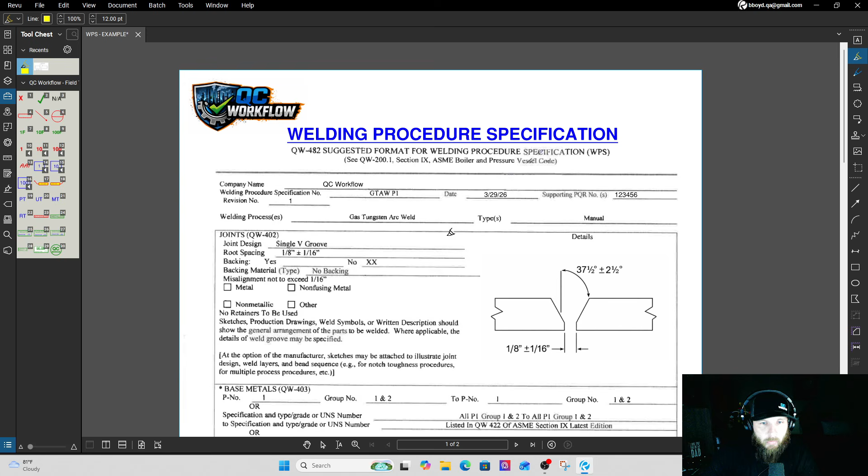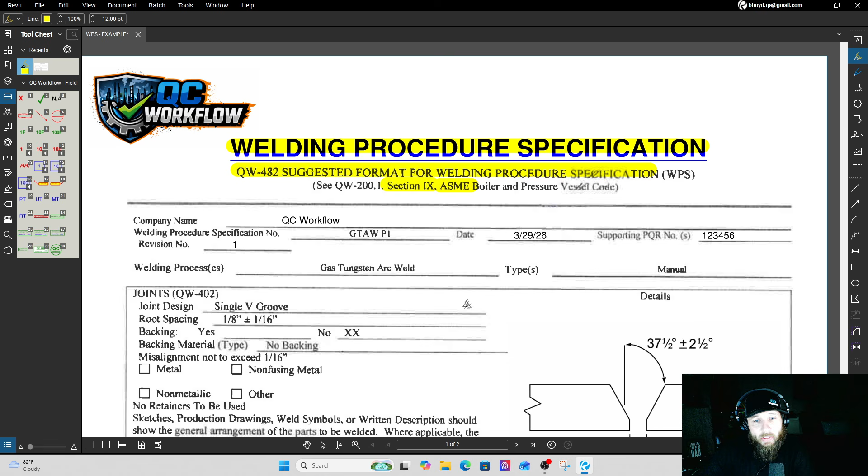Let's get into it. Alright, so right here at the top we can see it says Welding Procedure Specification, WPS. Underneath that it says QW-482, suggested format for welding procedure specifications. This is just saying that per ASME Section IX, this is just a suggested format. So it doesn't have to look exactly like this, but this is a really commonly used format and a really good one to learn from.

So right here, company name, we have QC Workflow. Our welding procedure specification number, we got GTAW-P1. This is basically just a unique number that every procedure should have for tracking purposes. A lot of companies are going to have something different there, but there's always going to be some type of unique numbering system. For date, we have 3/29/26. For revision number, we have number 1. This date is important. You always want to make sure it's the most up-to-date procedure, because you don't want to be using one that's already been superseded by another one.

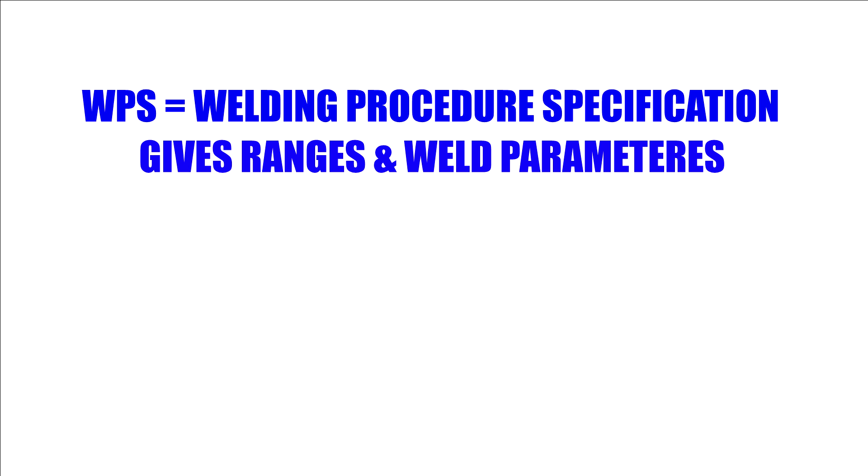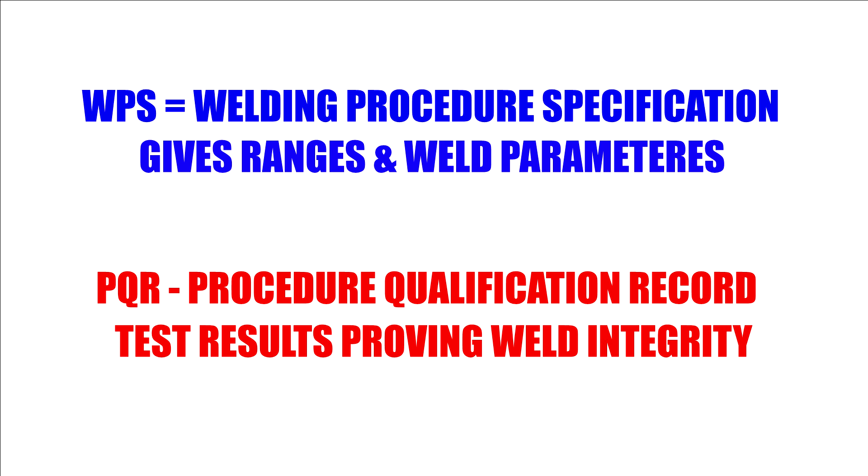So right here we have supporting PQR number, and we have a number here. This number is really important. It's a big deal, so let's do a quick 30-second breakdown. The WPS gives you acceptable ranges and tells you how the weld is supposed to be done. The PQR, or Procedure Qualification Record, is the record showing test results proving that the procedure will work. Basically, a weld was made using specific criteria. The weld was tested. Those test results are documented in a PQR. The test results prove that by using that criteria, you can produce a weld that is reliable.

Once this is proven, then a welding procedure is developed, giving you the ranges that you can use to make the weld. Bottom line, you can't qualify a welding procedure without a PQR. The WPS is the instruction sheet and the PQR is the evidence backing it up. My next video will be a line-by-line breakdown of a PQR.

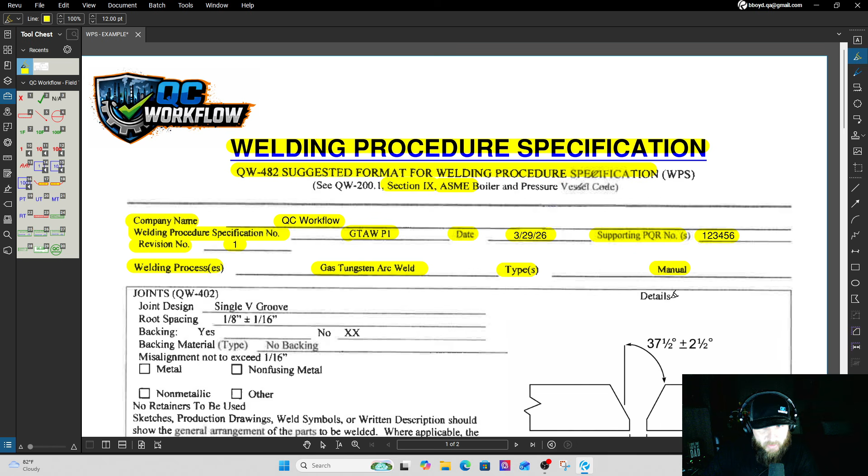So here we have Welding Processes. It says GTAW, or gas tungsten arc welding. This tells the inspector and the welder which welding process this procedure was written for. It has to be followed. That can be the only process used with this procedure. If you try to use a different process, then you're changing an essential variable and a new procedure would have to be qualified. For types, we have manual. That's just telling us that this welding has to be done manually. It can't be done with a machine or automatically.

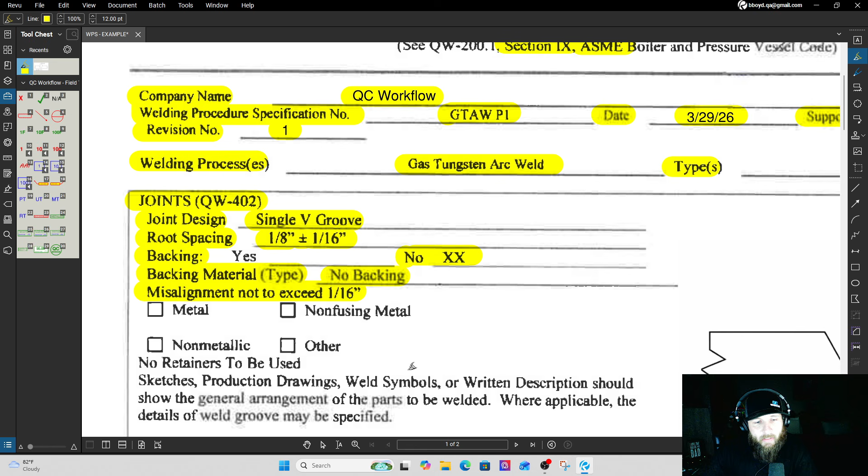Now moving into joint details. For this procedure, the joint design is a single V groove. For root spacing, it shows 1/8 inch plus or minus 1/16 inch. So you want your root spacing to be 1/8 inch. That's the target measurement, but they give you a little bit of play there, plus and minus 1/16. For backing, it shows no, so no backing is allowed. And for backing material, it shows no backing, which makes sense. Misalignment not to exceed 1/16 of an inch. So they are referring to fit-up, and that is your tolerance for your high-low whenever you're fitting your pipe.

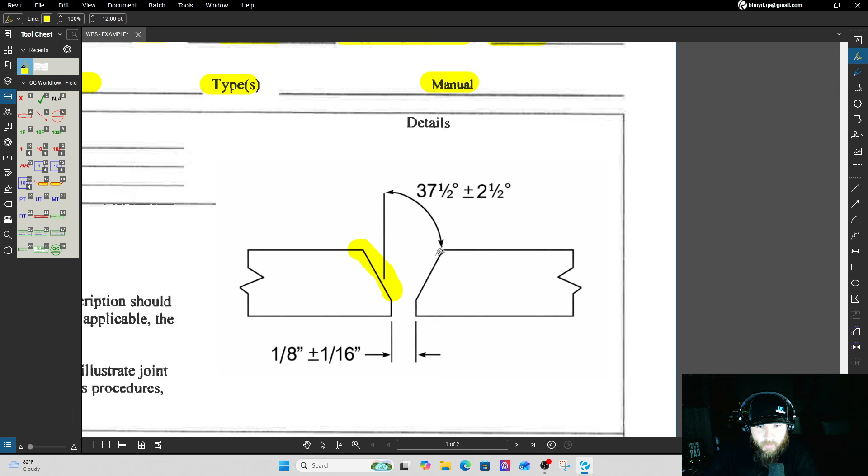So moving over here to the right, we have our joint detail. This is just reiterating what the text says over here, which can be more helpful than just trying to interpret this from text alone. You can see that it shows a single V groove with your 1/8 inch root spacing plus or minus 1/16 inch, and it shows a bevel angle of 37.5 degrees plus or minus 2.5 degrees. So if someone asks you, hey, where'd that bevel angle come from? Then you can show them it's right here on the welding procedure.

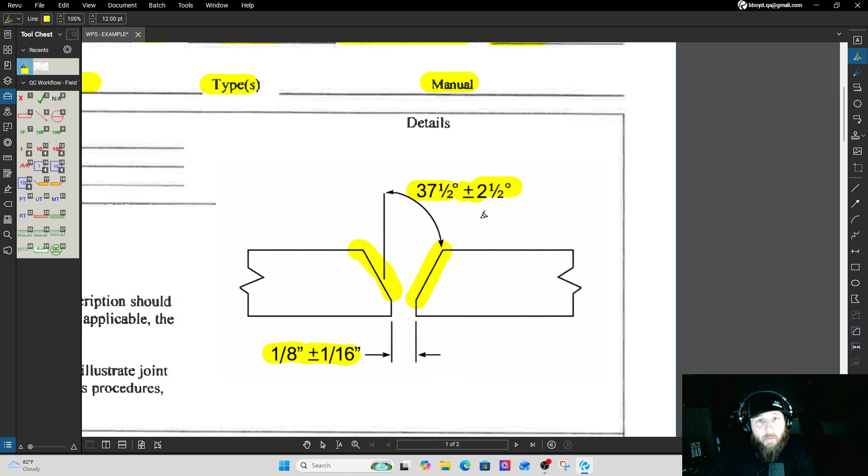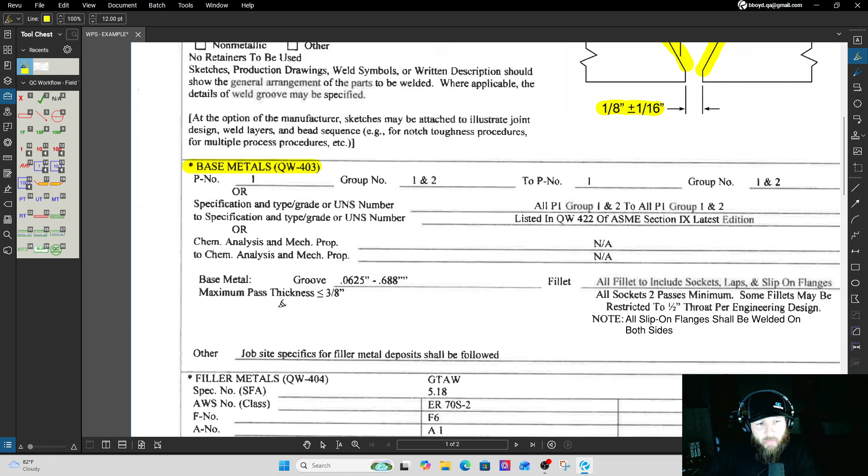So moving down to base metals. This section basically just tells us what materials and what ranges this procedure is qualified to weld. So this shows that we can weld P-Number 1, Group Numbers 1 and 2, to P-Number 1, Group Numbers 1 and 2. Under ASME Section IX, P-Numbers group materials with similar welding characteristics.

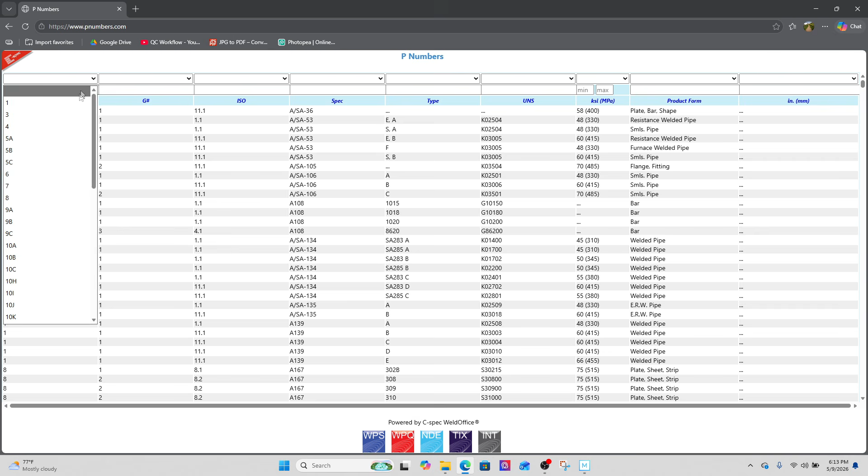Specification and type and grade. It shows all P1 Group 1 and 2 to all P1 Group 1 and 2. That means this procedure is written to apply across that range of base metals, not just one grade.

Now we are at base metal thickness. For groove welds, it shows 0.0625 inches to 0.688 inches. So this is your range of thicknesses for materials you can weld. So you can't weld anything less than 0.0625 or around 1/16 of an inch. And you can't weld anything thicker than 0.688, which is about 11/16 of an inch.

You have to stay in that range or else you're changing an essential variable and you would have to requalify a new procedure. For things like this, you can use a decimal to fraction conversion chart.

Here it shows fillet weld requirements. It says all fillet to include sockets, laps, and slip-on flanges. All sockets must have 2 passes minimum. Some fillets may be restricted to a 1/2 inch throat per engineering design. And it has a note here that says that all slip-on flanges shall be welded on both sides.

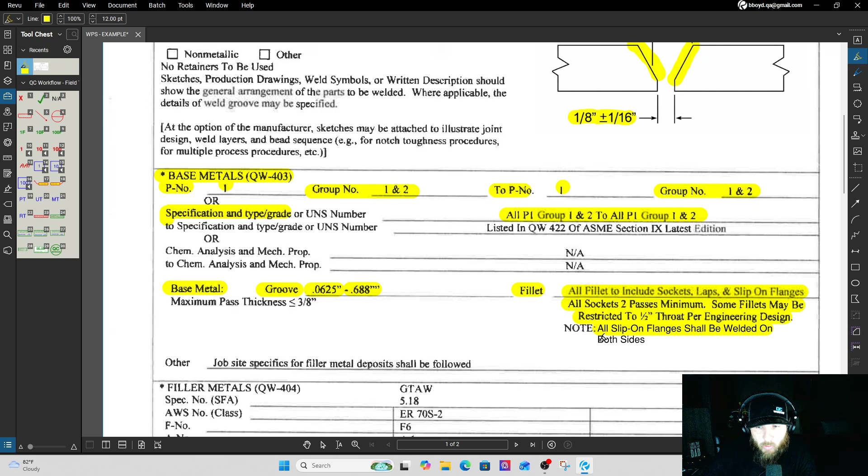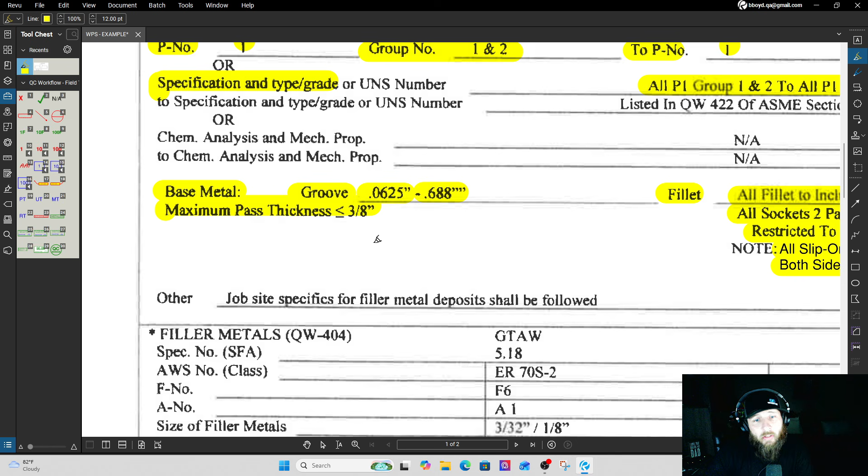Coming back over here by base metal, it shows maximum pass thickness is less than or equal to 3/8 of an inch. So that's saying that in each pass, the welder can't deposit a weld that's thicker than 3/8 of an inch. So now let's take a look at filler metals. This section tells us which consumables are supposed to be used. Specification number, we have 5.18. This is the ASME spec that governs carbon steel filler metal for gas shielded arc welding.

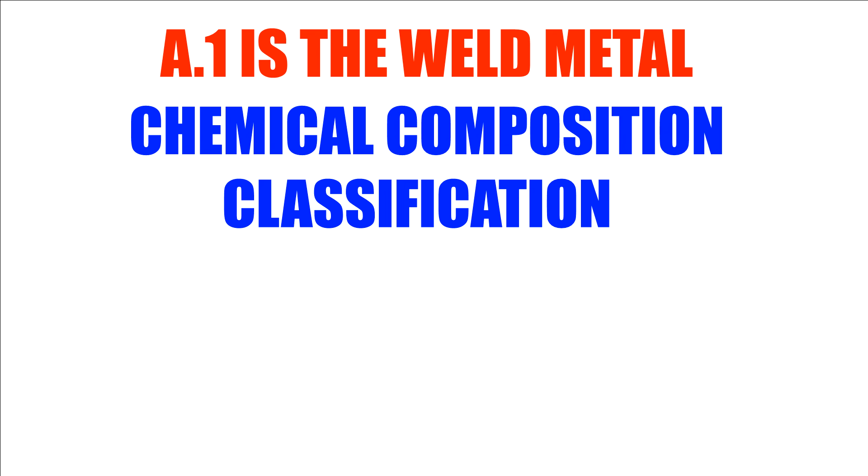For AWS number, it says ER70S-2. That is the type of wire that we would need to use when using this procedure. For F number, we have F6, and for A number, we have A1. F number 6 is an ASME Section 9 filler metal weld group. It covers solid wires and rods for GTAW and GMAW filler metals. A1 is the weld metal chemical composition classification. It specifically corresponds to weld metal with carbon steel chemistry.

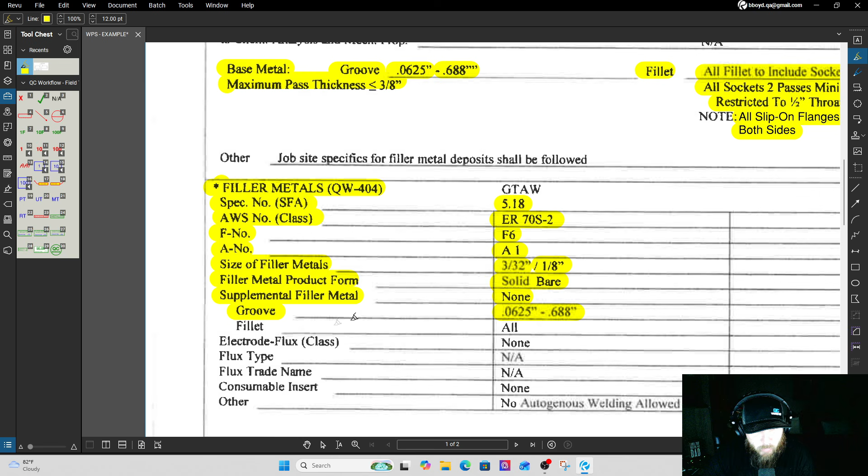For size of filler metals, we have 3/32 and 1/8. Those are the sizes we have to use. Filler metal product form is solid bare, which makes sense because it's GTAW welding. There is no supplemental filler metal. Here it again shows us the range for our thickness for our groove welds, and for fillet welds it says all. That means that any size fillet welds are allowed as long as you're still staying within the limits of this procedure. For electrode flux class, we have none.

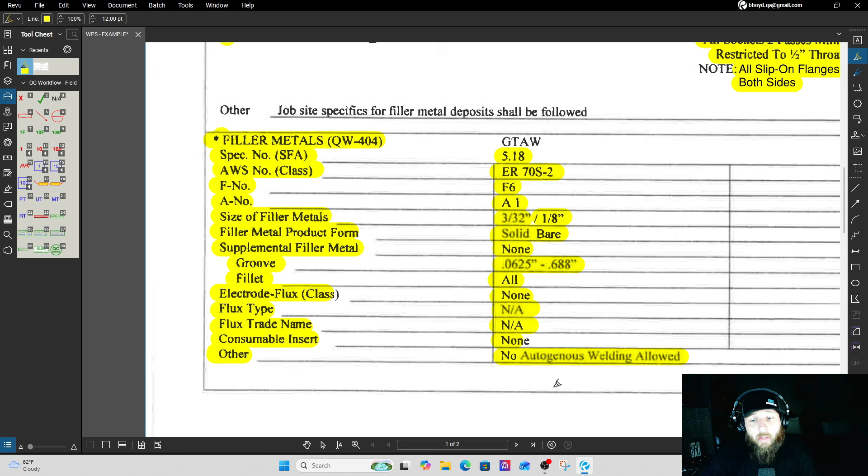For flux type, we have NA. Flux trade name, NA. Consumable insert, none. And that's because this is all GTAW welding and we're not using any kind of flux. So this note's pretty important. It says other, no autogenous welding allowed. So that is telling you that you have to use filler metal whenever you make a weld. In GTAW, sometimes you can weld without filler metal. This is just telling you that you cannot do that. If you do that, then you're changing an essential variable and you would need to qualify a new procedure that allowed autogenous welding. So moving on to page 2.

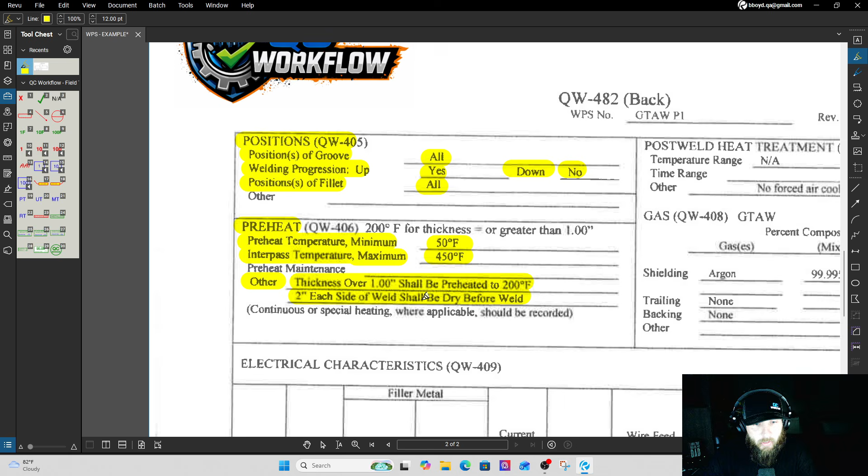Moving over here to the right side, we have post-weld heat treatment. For temperature range, it shows NA. There's no time range. So it's basically telling us that post-weld heat treat is not required using this procedure. It does show other, and it has no forced air cooling permitted. So even though there is no post-weld heat treat, there is still a cooling requirement that you have to pay attention to.

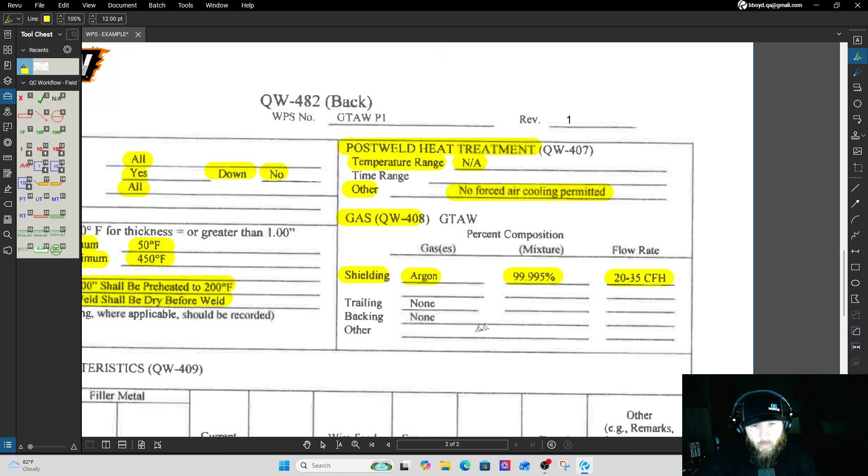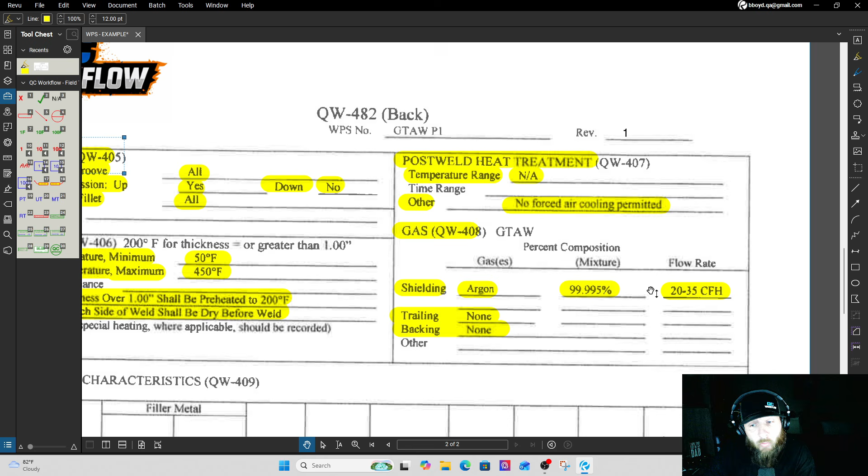Moving on to shielding gas, it shows that we should be using argon with a 99.995% purity or mixture at a 20 to 35 cubic feet per hour flow rate. It shows no trailing gas and no backing gas. This section matters a lot because changing your gas type or your purity or your flow outside of this range is an essential variable. And what does that mean? Qualifying a new procedure. Now you're getting it.

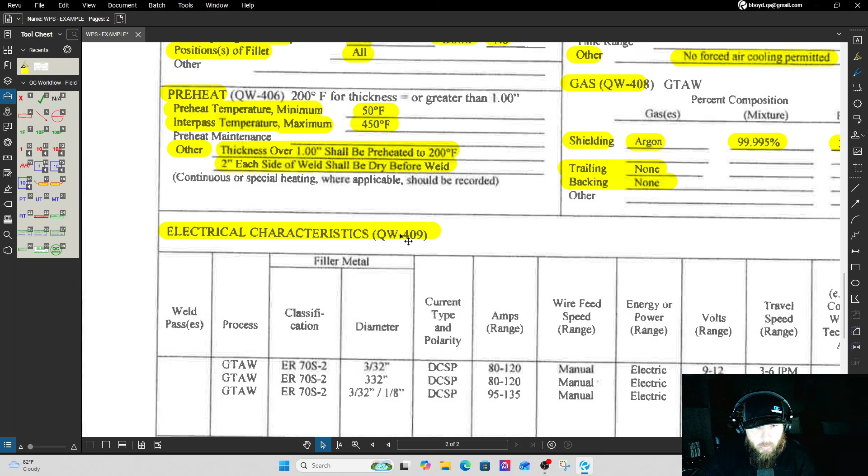Now moving over to electrical characteristics. This section gives you your welding parameters. So it gives you 3 different sets of parameters. All 3 processes are GTAW. All 3 classifications are 70S2 welding wire. 2 of the processes call for 3/32 for diameter, and your third process down here allows 3/32 and 1/8. For current type and polarity, they're all 3 DCSP, which stands for direct current straight polarity.

For your amps, the first 2 show 80 to 120, and your bottom process here shows 95 to 135, so you can crank up the amps a little bit on that one. They all 3 call for manual wire feed speeds, so we're hand feeding, so manually. They're all 3 electric for their power range. For voltage, this top 2 call 9 to 12. This bottom one calls 9 to 15, so it has a little bit higher of a max.

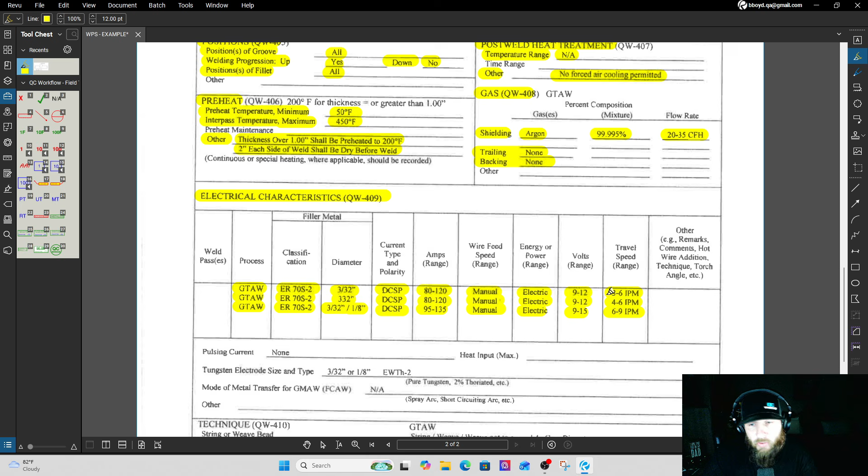And for your travel speed, all 3 are different. So that's what separates these top 2 processes. So it shows that the top one should be 3 to 6 inches per minute. The next one should be 4 to 6 inches per minute, and down here it shows 6 to 9 inches per minute. So when someone says that the welding procedure gives you your welding parameters, this is what they're referring to. This is the electrical characteristics. This tells you how to set your machine and tells you everything you need to know as far as your amps and your voltage and your travel speed and all those things.

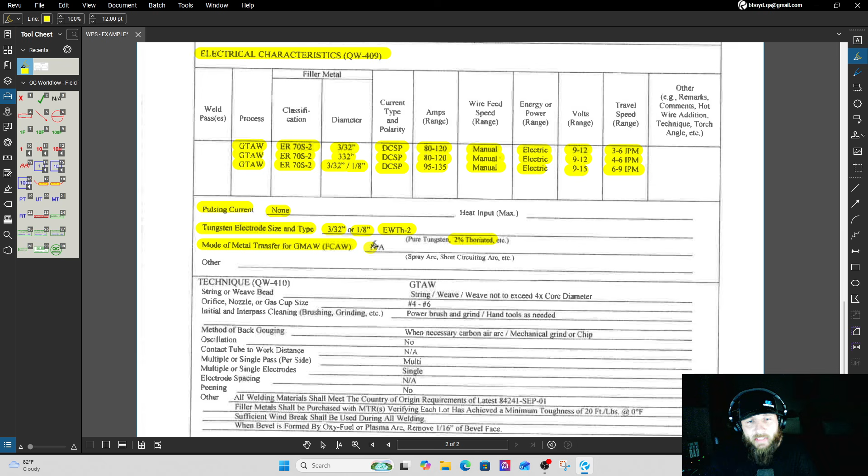For pulsing current, we have none. For our tungsten electrode size and type, we can either use a 3/32 or 1/8 tungsten. And it shows to use EWTh-2. That stands for 2% thoriated. Mode of metal transfer for GMAW, FCAW, this is NA because we are using GTAW.

And moving into technique. There's a lot of useful information that gets buried here because it's at the back end of the welding procedure, but this is really important information also. For string or weave bead, it shows you can run a string or a weave, but if you weave, it is not to exceed 4 times the core diameter. So if you were using an 1/8 inch wire, you would multiply 1/8 inch by 4, and you would not be able to create a weave that is wider than a 1/2 inch. For our gas cup size, we can use anywhere from a number 4 to a number 6.

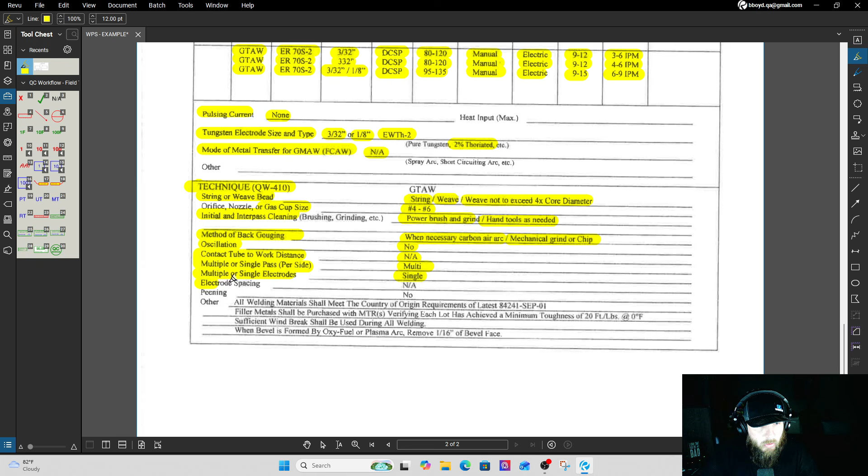Initial and interpass cleaning, it says that we can power brush and grind and use hand tools as needed. Method of back gouging, it says when necessary, use carbon air arc and mechanically grind or chip. So if you have to back gouge, you have to use carbon air cutting or do it mechanically. Oscillation, none. Contact tube to work distance, it's NA because we're using GTAW. Multiple or single passes per side, you can use multiple passes. For multiple or single electrodes, we are using a single electrode. No electrode spacing, no peening.

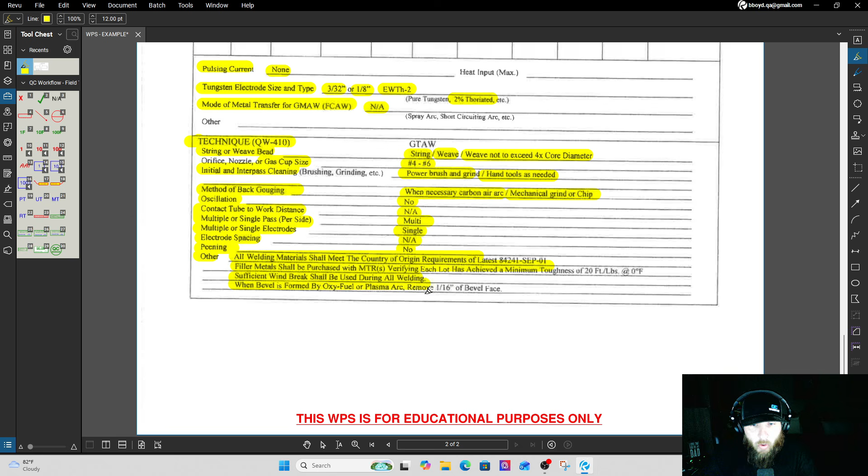And down here at the bottom, we have just a few more notes. It basically says that all welding materials shall meet the country of origin requirements. Filler metals should have MTRs. There should be sufficient wind breaks during welding. And when a bevel is formed by oxy-fuel or plasma arc, you must remove 1/16 of the bevel face.

So here's the big takeaway. Don't just glance at the welding procedure and move on. You want to check the process, the filler metal, joint design, material group, thickness range, preheat, shielding gas, parameters, and always read the notes. A lot of issues happen because somebody only looked at the top half of the procedure and missed a restriction that was buried lower down. Once you understand how to read a procedure, they become a whole lot less intimidating, and all it is is a roadmap for how that weld is supposed to be made. I'll be doing a step-by-step breakdown of a PQR next.